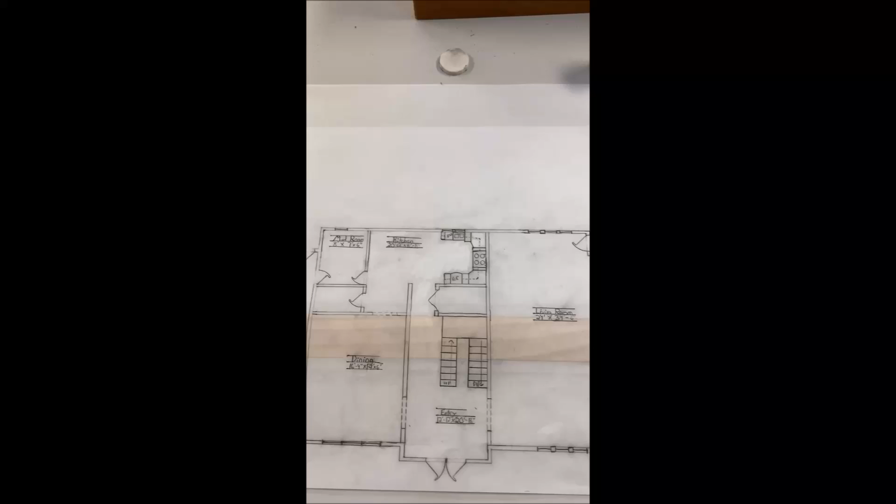All right, welcome to video 1 of the residential house board drawing. This is what you're gonna make.

First thing you want to know: you're going to use 1/4-inch scale. You've got to make sure you have 6-inch walls throughout the whole house, on your floor plan itself.

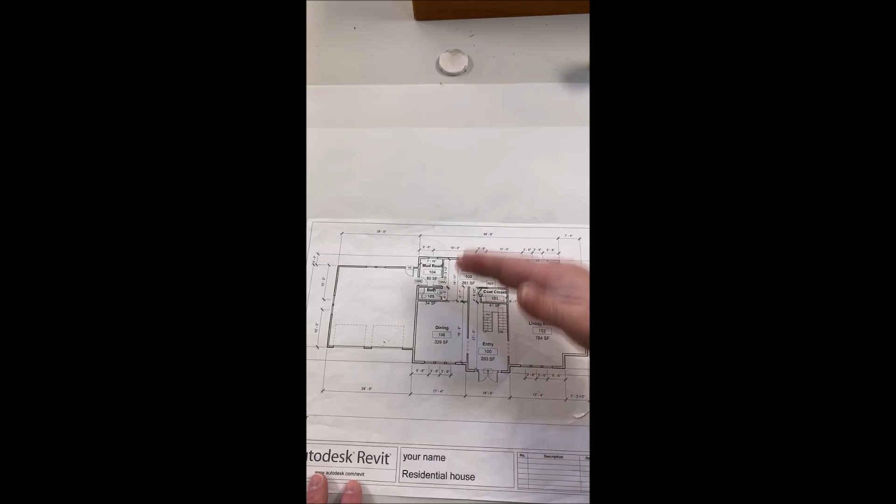These are not 6-inch walls, so your measurements are going to be a little bit skewed. These are 4.5-inch walls, because it's a 2x4 with a 1/2-inch drywall on each side, which actually adds up to 4.5 inches. The outside walls are thicker. Most important thing is that these measurements are exactly the same.

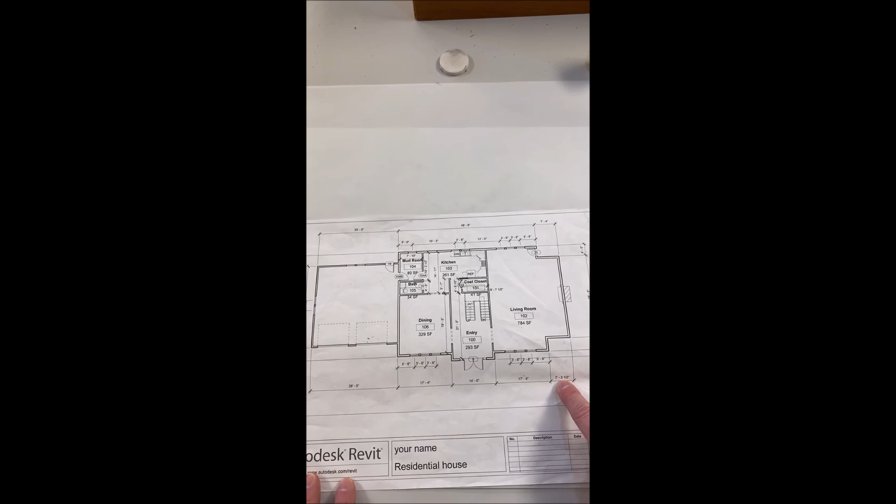This 7'3" you're actually going to change to 7'4" if you haven't already done so. That is an error, as this one right here should be 4 feet.

1/4-inch scale—yes, this says 1/8 inch. This is drawn and printed off to 1/8 inch, but you're going to use 1/4-inch.

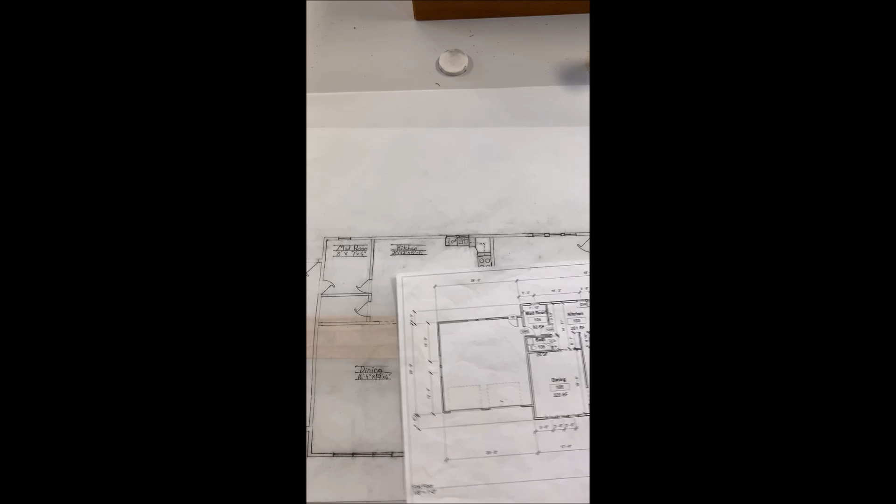Got it? Good. Let's draw this thing. I'm teaching at the same time, so this should be really interesting.

So I need a ruler, that would help out immensely. Just eyeball it? Yeah, that'll work out great. Yeah, just eyeball a house. What could possibly go wrong?

Okay, to get started off—I'm going to shift my camera a little bit over. To get started off, guys, I would go on a 1/4-inch scale about 8 feet up and 8 feet over. That way you have enough space.

So 8 foot by 8 foot over here. Oops, you guys can't see. Oh crap, I can't rotate it the other way. It's gonna be upside down on my drawing, because it won't allow me to do it any other way. Poop.

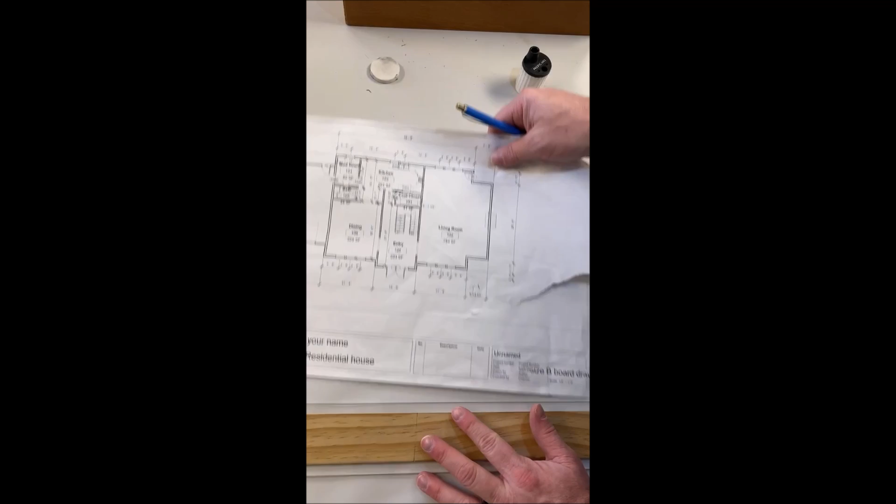Okay, so just as the plan shows, we're gonna start off with this 28-foot line, then down 4. And I'm gonna start right there. So set that aside—hopefully you have space at home to do this. And you're gonna draw a line 28 feet over.

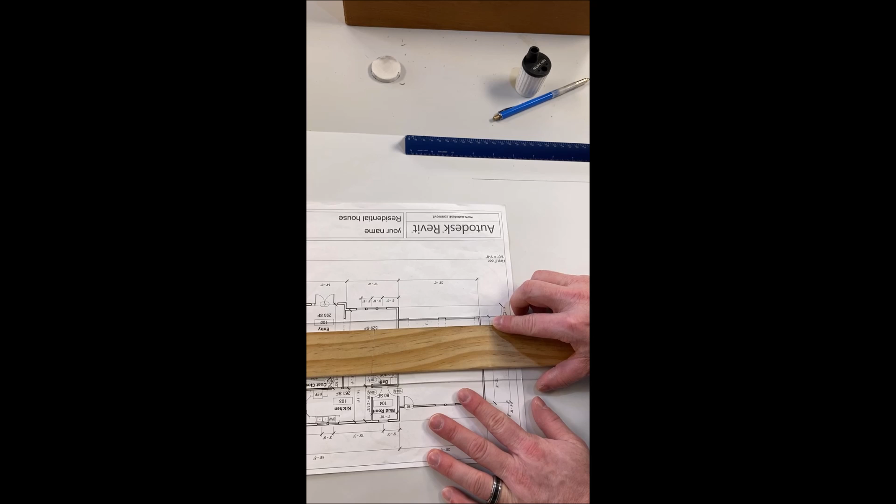Now also, keep this in mind, otherwise your elevation is gonna be messed up. These lines here should line up—see that? These lines here should all line up. So keep that in mind.

Alrighty, and then I'm gonna go 4 feet down. Then 17.4 over—make sure you hit that at 17.4. So I'm gonna make sure the outside line's on 4 feet right here, then go over to 17.

Then down 2 feet. I'm gonna do this fancy because my T-square's in the way of the camera, so I'm gonna have to do it like this, which is not fun, but I don't have another choice. So this goes down now 2 feet.

Go. And that goes 14 feet over.

Are you guys okay, by the way? I'm struggling to... Is your T-square wobbly? No, my head. Oh, yeah, well, you got a broken thumb. That's probably not going to help out that cause. It's my wrist.

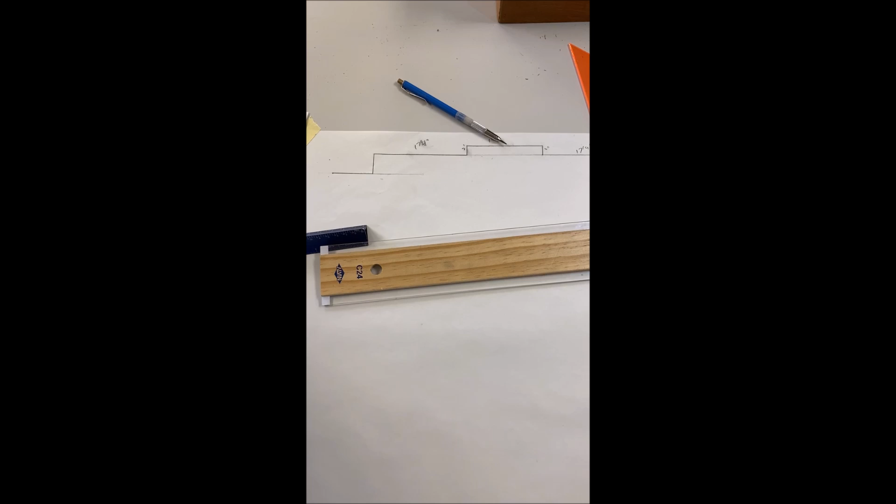Right there. And now I can erase this part right there. If you did it like me, the eraser shield's coming really handy right now to clean things up a little bit, which is what I'm going to do next in order to erase some of these excess lines. Still not done yet, but at least I got the exterior of the front done. There we go. All right.

Do you guys have any questions while I'm doing this? Or are you guys good? Or have I lost you guys because I'm just kind of making the video, or what's going on? Okay, you good, Bert? You good, Donovan? Okay, Randy, got questions? Yell at me.

All right, going up here, 28 feet up. It's been years since I've drawn this house. Kind of enjoy floor plans by hand.

Now, once again, these walls should line up, so if I want to cheat this a little bit, I easily can by just taking this thing and I can just kind of eyeball where that's at, and draw this line going over in order to save measurements and time. There we go, just like that.

And I'm dealing with this camera, so I have to do that once in a while. So this line here goes up 4 feet, like so.

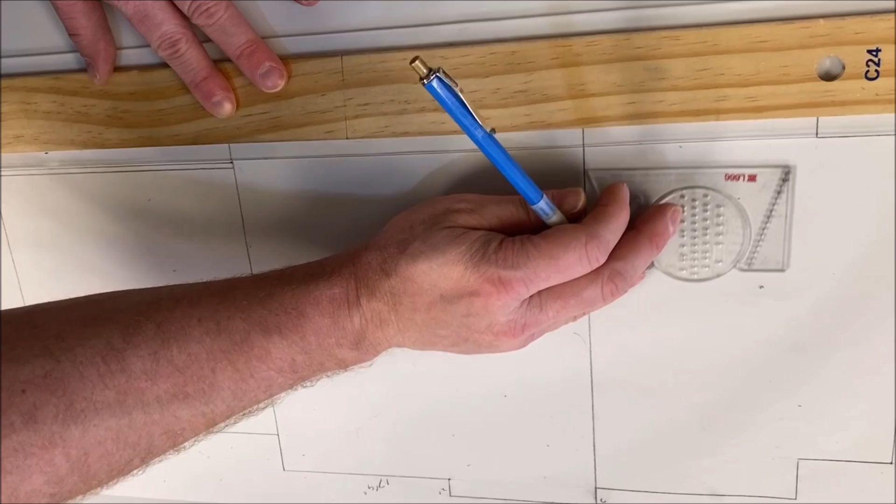First hole, yep, because that's 6 inches. And what I would do if I was you guys, I like keeping my T-square on one side and doing all those walls first. That way I don't have to shift things around as much. But you do whatever you want to.

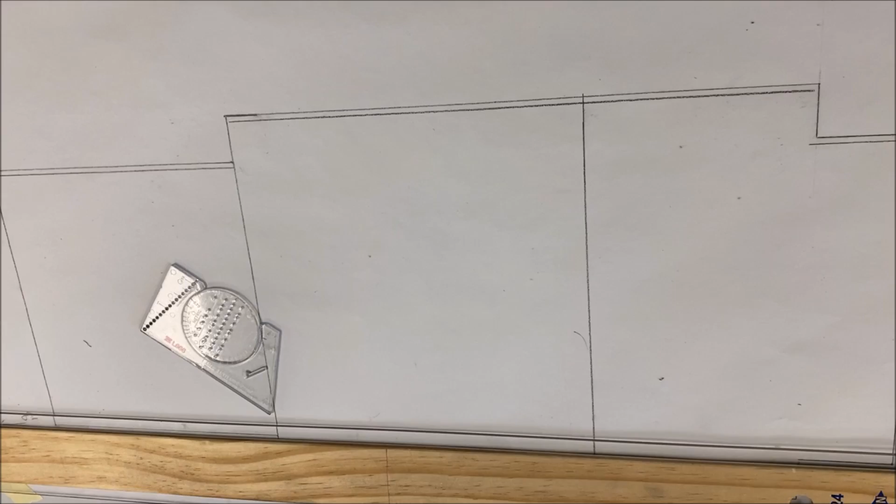So you put your T-square along the line that goes in the first hole. You put your T-square along this line here, you put this right here, and then you put it in the first hole and you draw it across. Probably the simplest way to be able to make it if you know all your lines.

And I know my lines, I named them. This is Georgie.

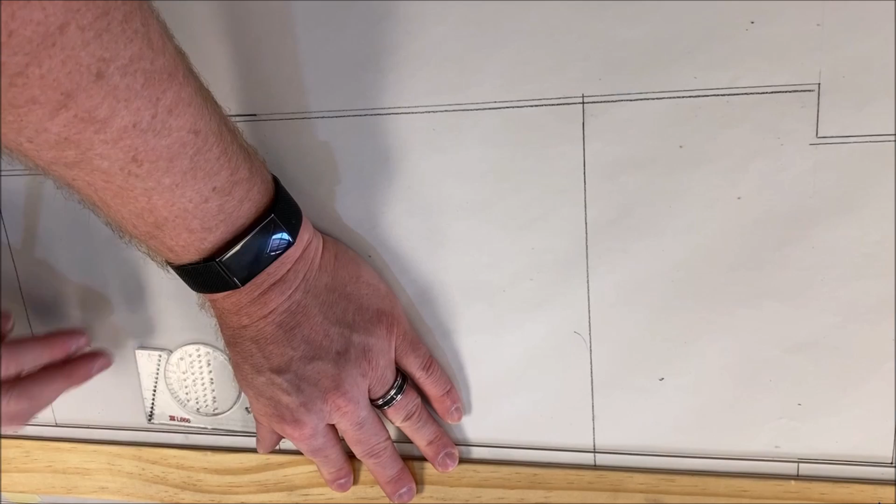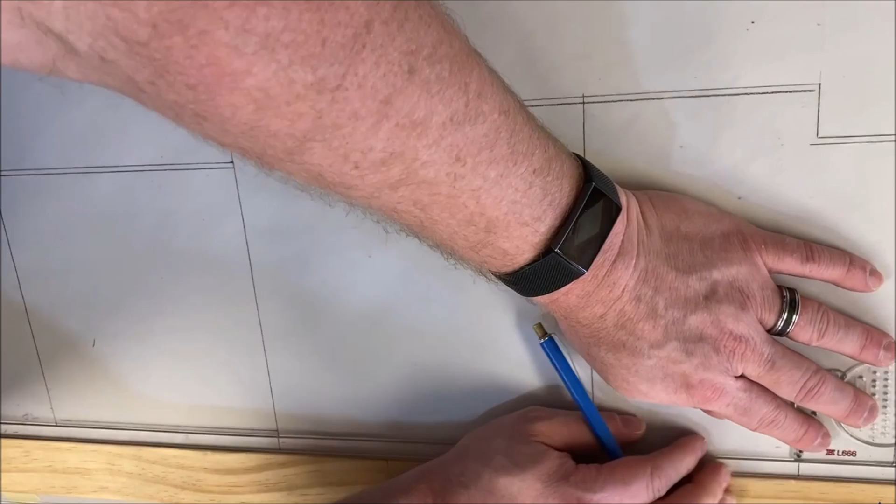You will have to do a bunch of erasing here in a minute because you want the walls to be what I like to call fluid, but I'll show you what that is here in a minute. So I just like to go all my vertical ones first, then my horizontal ones, or whatever way you're looking at it. I think I got those two backwards, but that's okay.

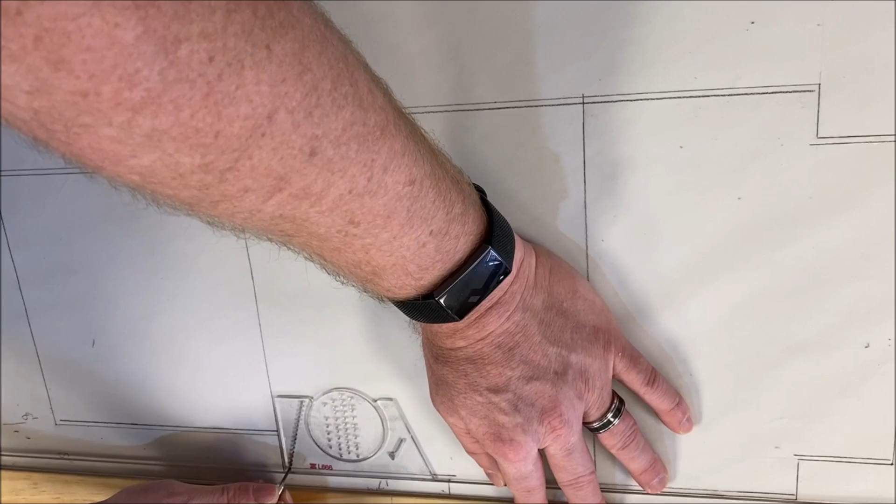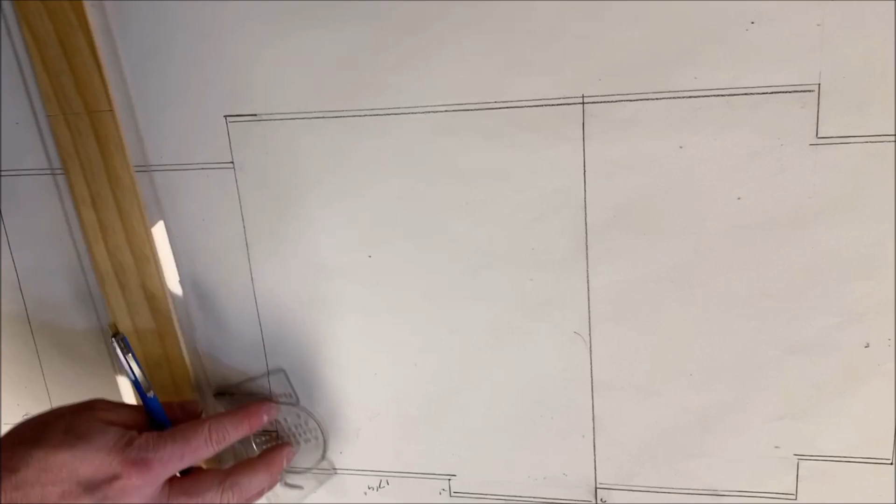Go there. Oops, I forgot the bottom. Okay, then rotate. Now, this inside wall right here, guys, you put the wall on this side, not this side. On the side that's not the garage.

Just so you know, your walls should not have a separation between them. So they should be fluid like this. If you want to look up here real quick.

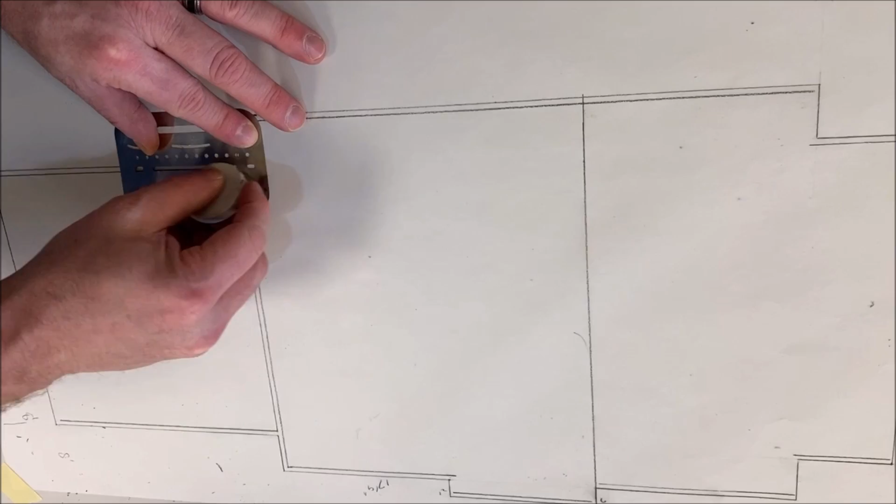Brady, let me see your eraser real quick. So like, if your wall looks like this, you actually need to go back and erase the inside line using your shield. That way the walls are what I like to call fluid, so that these things don't look like they have separation. And once in a while you might erase the wrong thing. And then move my shield down all the way. There we go. So that's how you do that.

I have to deal with this nightmare of a setup I have here. Nope. Nope. I'm just gonna mark mine.

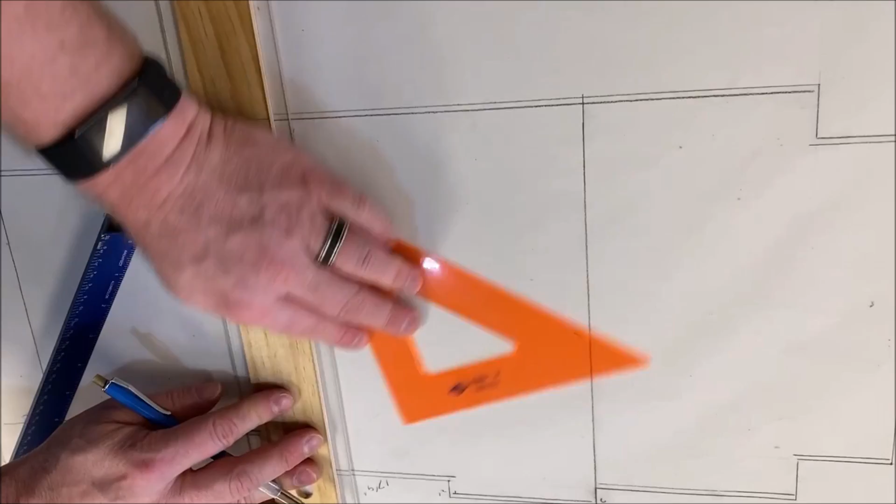So the other way you can do this is if you're struggling with getting that like I am, you can just do a 6 inch wall by making a little dash like this.

Yeah, I cannot find this to save my life. Nope. Nope.

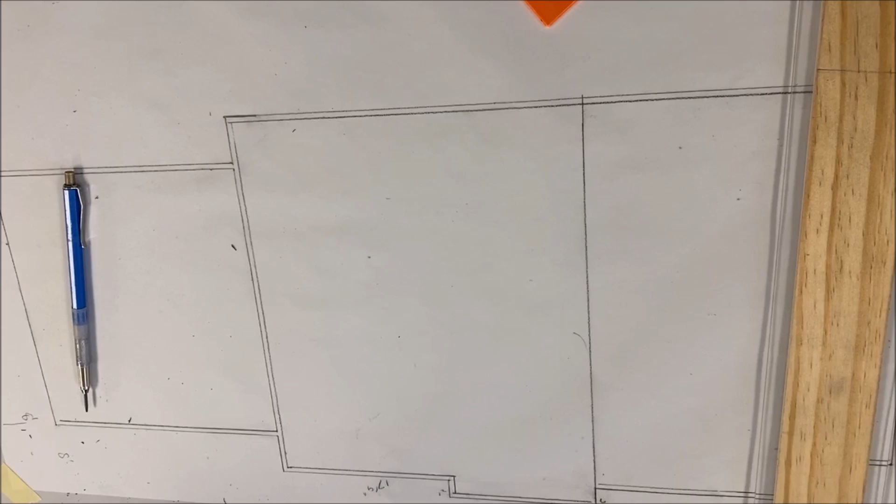That's good. This wall here goes inside as well. As is this one right here.

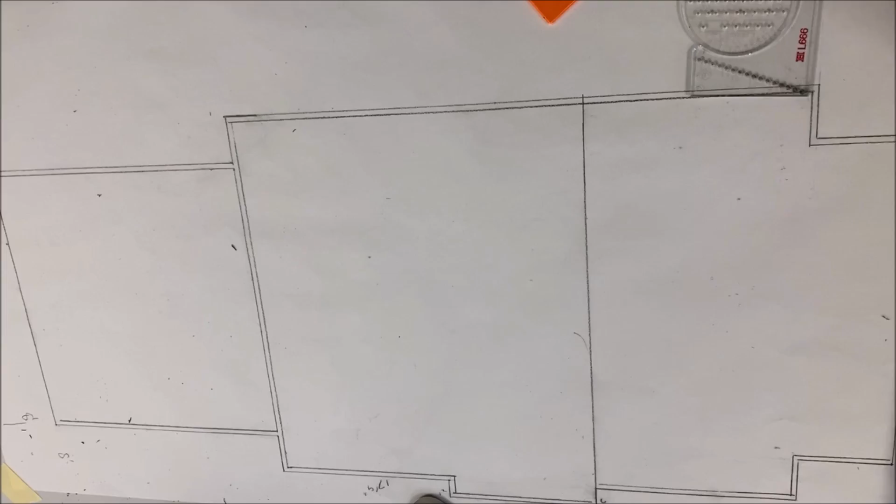And what that mark is. There we go. And then this one goes inside. I had to mark it because I got too much stuff in my way.

Six inches. Oh, that's right. I'll take it on the end. And do it this way. There we go.

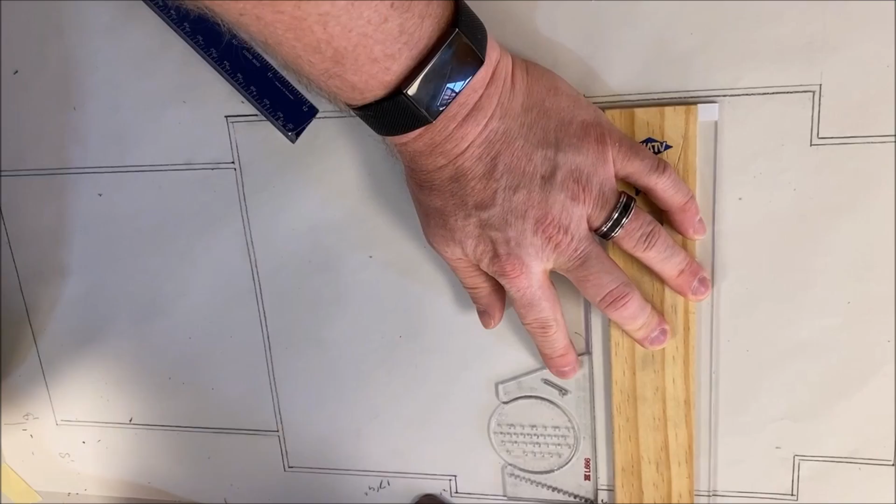Okay, once you get your lines drawn, it's time to start erasing. So you're gonna go around your house here and you're gonna erase anything that is an intersection in your walls. That way, as I said, things will kind of flow, be fluid.

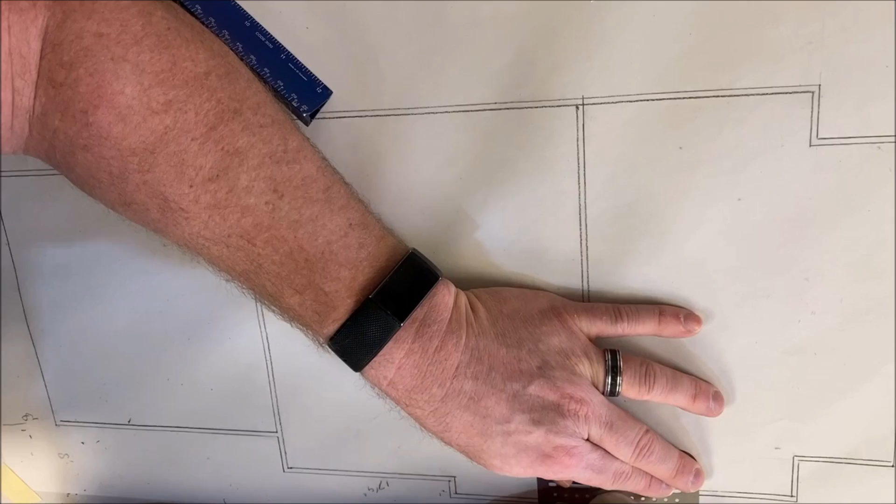This will take some time to get it right. That's okay. Because we want this to look nice. So start erasing the stuff that you don't need. And I'm not talking about your math homework either.

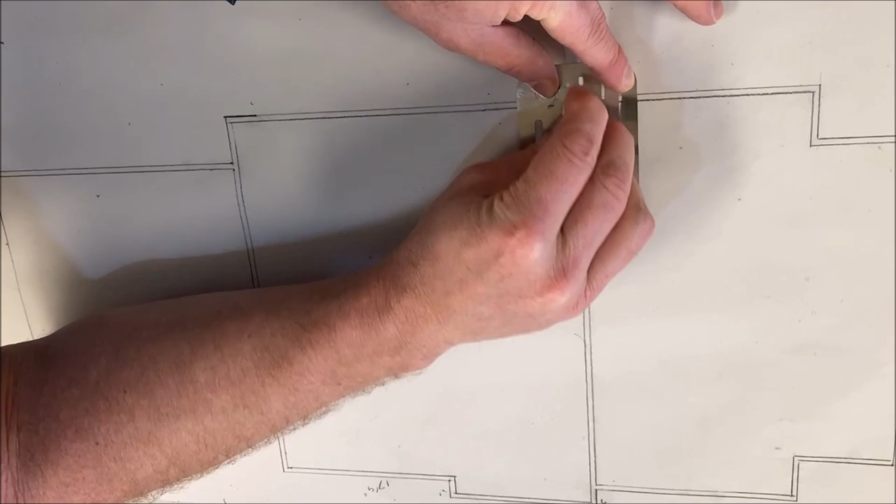You gotta love eraser shields. Oops, I forgot one. I forgot this one over here.

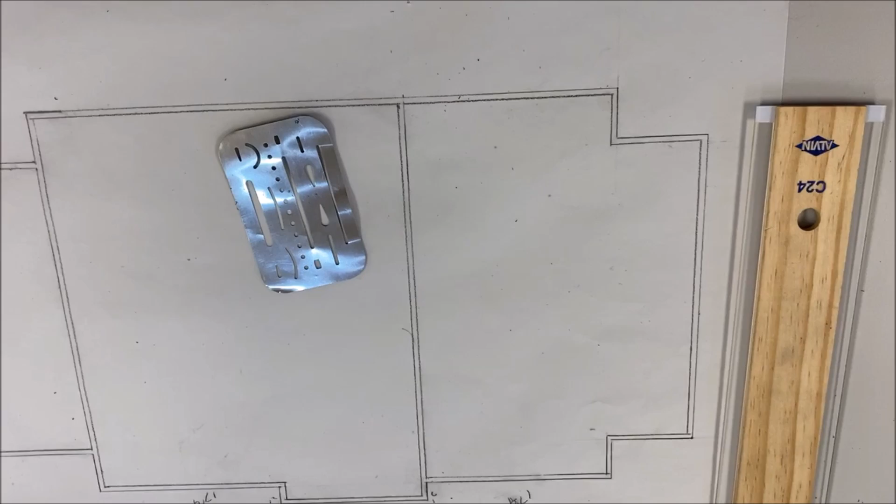There we go. Inside walls now complete. You should have this done. And oops, I forgot that one over here too. And a little bit ahead of myself.

There we go. All right. Done with this part. Interior walls finished. You should have this right now.